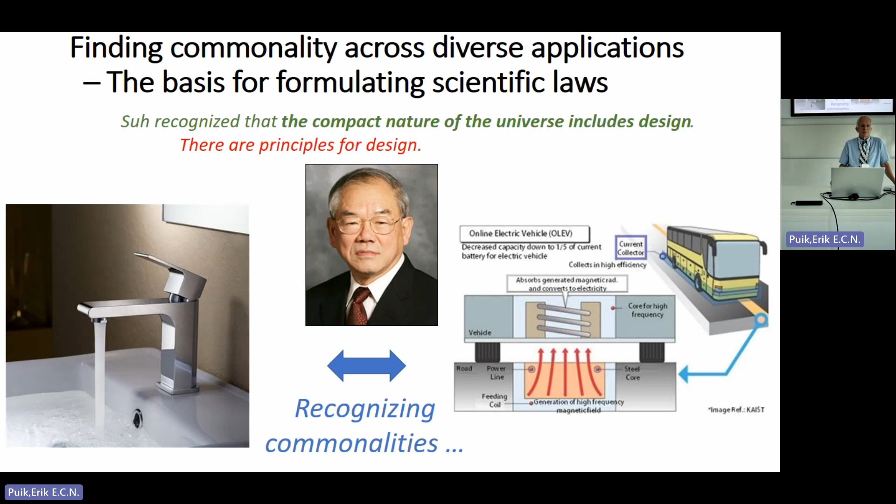So looking for things like the law of gravitation requires looking at commonalities across very diverse applications, just like an apple falling on Earth and the little lights wandering around the sky at night that the Greeks called planets. And so what are the commonalities between a water faucet and an online electric vehicle? And how are those things connected?

Well, two axioms. Now, oftentimes we get engrossed in the application, how to apply axiomatic design, but it's called axiomatic design because we've got two axioms. And so we need to get these out in front, all right? So we have the independence and the information axiom. There's corollaries and theorems. I'll leave that to you. So we have the design theory, and then we have a design method that's based on that.

Now, when I talk to our engineering students presenting their senior projects, after 4 years of studying in the United States, investing over $250,000 and 4 years of your life, and it's design that distinguishes engineers from scientists, creating something new. And I ask, so what design method did you use for your project? And they look at me, oh, the usual or something. And I ask, and what design theory is it based on? And they look at me like I came from Mars, like they'd never heard these two words juxtaposed before.

And alarmingly, when I go to GE aircraft engines and teach a course on axiomatic design, as I've done, I get the same response. Like, what is the difference between the design method and theory that you're using now to design aircraft engines and what you did in high school before you went to college? Not analysis. Yes, that has developed a lot, but the design, the way you come up with and develop a concept, ideas. And they can't think of anything.

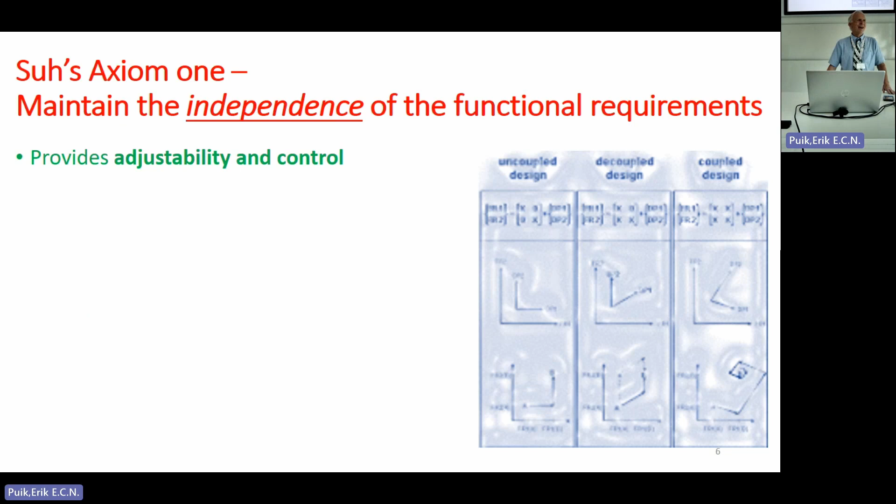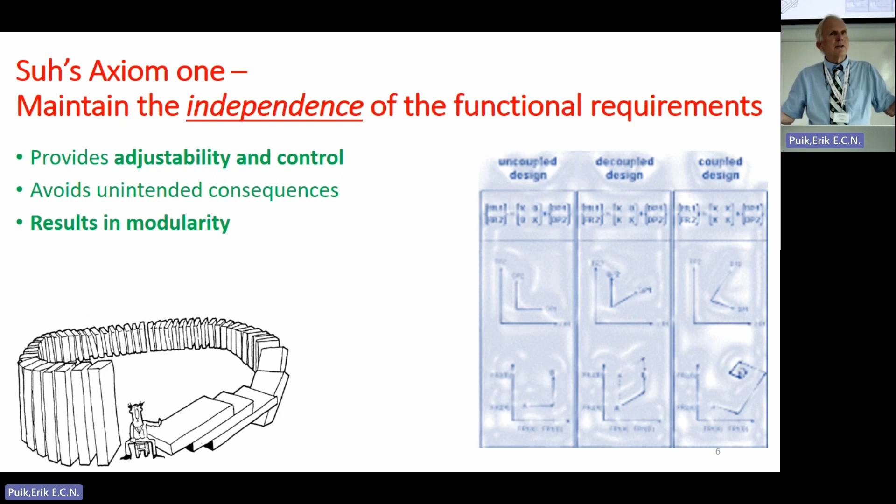All right, good, okay. So adjustability and control. We like to avoid unintended consequences. These are often what lead to cost overruns and delays in design. We finally get to make a prototype, start testing out, geez, this doesn't work. Modularity is great because we can switch things out, like the Toyota production system and Toyota design system.

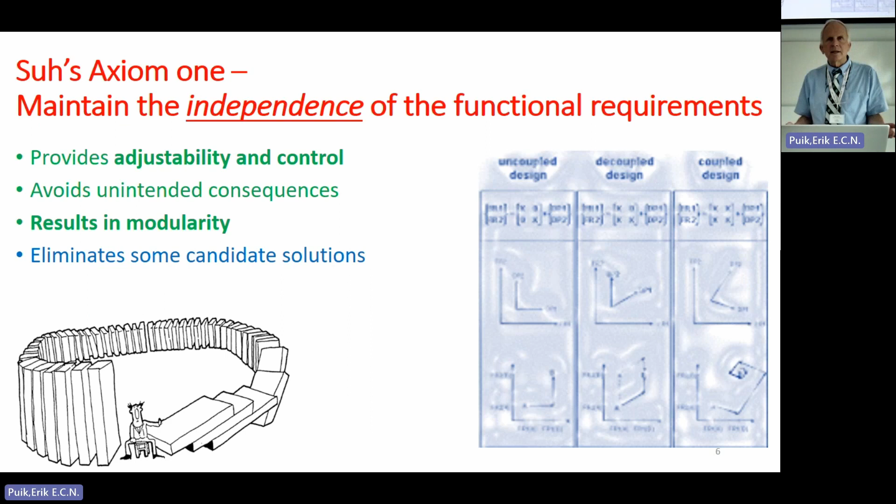And so if we require this independence, we eliminate some candidate solutions. And I'll talk more about how we do that stuff. So that was axiom 1, maintain independence of the functional requirements. And then minimize the information content. Now this gets confusing because some people think, well, information, isn't knowing more good? I like more information. Not if you need that information to make a design solution work.

The more instructions that it requires to get something to work, the greater the chances that somebody forgets one, doesn't understand one, misapplies one. And so that reduces the probability of success. So when you see information content, you can think sort of 1 over the probability of success, as it is quantitatively there. Information content is equal to 1 over the probability of success. And for the people that are familiar with Shannon's information theory or Boltzmann, for entropy, it's similar. So as I said, more instructions.

So information content does not equal knowledge. We have to separate these two things, at least when we're considering this. So axiom 2 essentially encompasses axiom 1. What are we looking for? Probability of success and having our design work. And anyway, because axiom 1 was about independence, lack of ability to control and adjust is going to affect our probability of success. So we could also say axiom 2 will reduce uncertainty and complexity in design, so minimizing malfunction possibilities and influence of wear, temperature, other things that change.

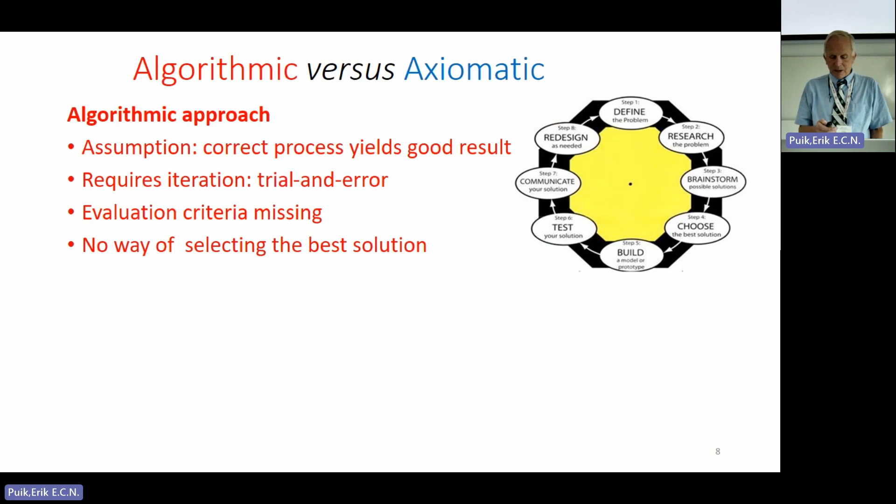But there's no way of selecting the best solution a priori until you try it. And then you don't know if you have the best one. You go, oh, geez, we got a prototype that works. So axiomatic design, we've got 2 axioms, and this essentially guarantees the best solution for a set of functional requirements. So we'll be talking about the importance of getting a good set of functional requirements. It also has an overarching and inclusive structure.

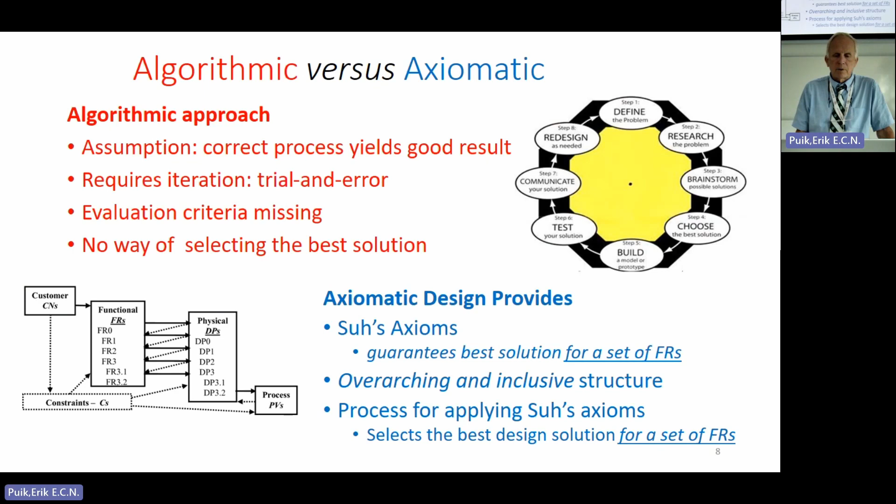So yeah, we could have little bits of algorithmic stuff in there if we wanted, and I'll talk about how I like to integrate something called CK theory. And we need a process for applying Suh's axioms to make this work. We talk a lot about design thinking, and we have to do design thinking. So when you ask people, they go, oh, we have to do design thinking. And you go, so what is design thinking? The answer I get most often is, oh, thinking about design. And you go, okay. Do you have another one without just switching the order of the words? So being an American, I like to go back to the architect, Louis Sullivan.

So think of a function. This is what Nam Suh says in axiomatic design: formulate a function that satisfies a customer need, and then select the form, the physical solution, the design parameter. Remember these abbreviations: FR, functional requirement; CN, customer need; and DP, design parameter. The design parameter is the physical solution.

We have to watch out, because design can be a result or a process. Lots of times we'll talk about the design solution being the physical manifestation of how we're going to do it. There's this neat example that I credit Professor Selenius with. As I understood it, he was first introduced to axiomatic design and decided to spend a year at MIT learning more about it from Nam Suh, and he came up with this example then.

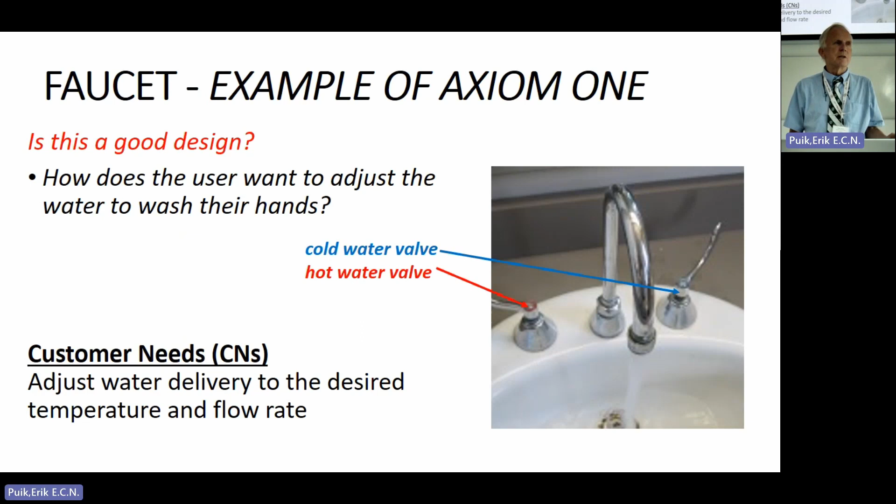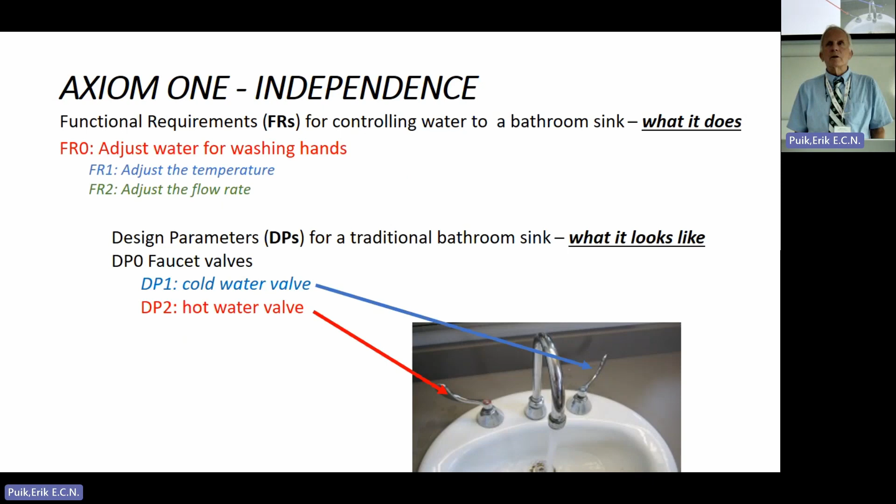What do we have for adjustment in this setup? A cold water valve and a hot water valve, so we've got 2 handles. Is this a good design? The question is, can we adjust flow rate and temperature independently? Functional requirement 1, adjust the temperature. Functional requirement 2, adjust the flow rate. The design parameters: control a hot water valve and a cold water valve.

If we make a little matrix like this, we put the functional requirements down the left side and the design parameters across the top, and then we put an X in the matrix if there's an influence. We can get more sophisticated and put equations in, but for now we're just going to ask: if I write the differential equation relating FR and DP, is there a non-zero term for FR1?

And you go, yeah, that's right. If I change the cold water, it's going to change the temperature, and if I change the hot water, it's going to change the temperature. As a result, I have an X in the A11 and A12 positions in the matrix. And if I want to adjust the flow rate, both of these DPs are going to influence the flow rate.

We all have had experience with this at home. We sort of know how to adjust these, but we go to a new place, make a guess, and stick our hands under to test our prototype. Whoa, I get too much water, it's too hot, I've got to turn one of them. After a few non-productive iterations I'm not getting my hands washed, but that's not very important. I can waste a little water; we haven't completely ruined the planet.

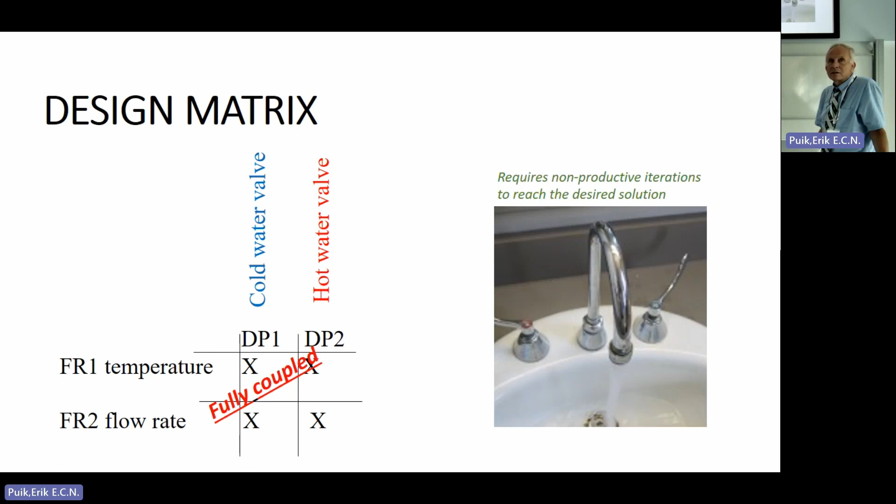But if this is production, if I'm making computer chips and I have to do these iterations to adjust, what was it, 3 months to make a chip? This would not be a good system for doing that. So independence is important. This is fully coupled, so it's lacking independence.

So what's a better solution? We've all seen these nice controls for a faucet. Up and down does flow rate, and side to side gives us temperature. Going up and down doesn't do anything to the temperature; it just does the flow rate.

So we have the interactions. Side to side gives me the temperature. Up and down does not change the temperature. So we have a representation, and this now satisfies axiom 1. It's a diagonal matrix.

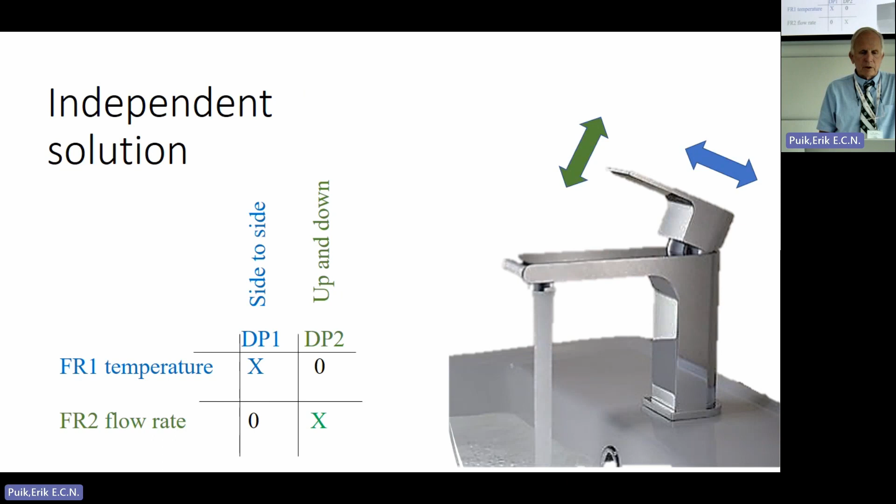We could also satisfy axiom 1 with an upper or lower triangular matrix. So that was an example of axiom 1. The example of axiom 2 that I came up with, I wish I had something as clean and neat as the faucet.

But in this case, we're trying to make a clamp, and we've got it represented here by 2 pieces. It could be adjusting a chair or something like that, and we adjust it, and then we close the clamp, and the clamp is represented here by this oval. And it has in it some sort of spring. I mean, everything's a spring. It could just be a bolt and very stiff, but there's some sort of spring system.

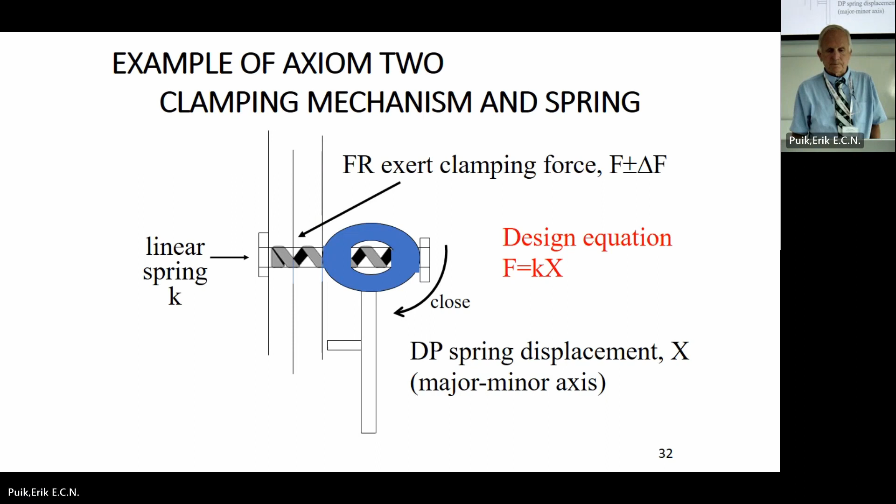And then, as I close this, my design equation gives me the force. So FR, I want to exert a clamping force. And then my design equation, F equals Kx, where K is the spring constant. And then the physical thing is the displacement as I close the lever.

So if I can graph it this way, I can say, all right, here's the range of forces that I might have. And if I have too much of a force, I'm going to break something, or I can't close the clamp, and too little force, it'll slip. So there is a functional tolerance in the function, which is applying the force.

And then I have a physical tolerance, which is what are the dimensions of my cam, and how well have I controlled that? And that, of course, could change in production. That could change with temperature. That could change with wear. So I would like to have a nice big physical tolerance. So if I have a stiff spring, K2, a little bit of motion, I get a nice clamp.

And I admit, when I first looked at this problem, I thought, I want a stiff spring in there because I want to be able to exert a bunch of force. But that turns out not to be the best solution by axiom 2. The best solution with a higher probability of success is to allow me more tolerance in dimensioning the cam and getting the spring constant right. So I would like to have a softer spring with a smaller spring constant.

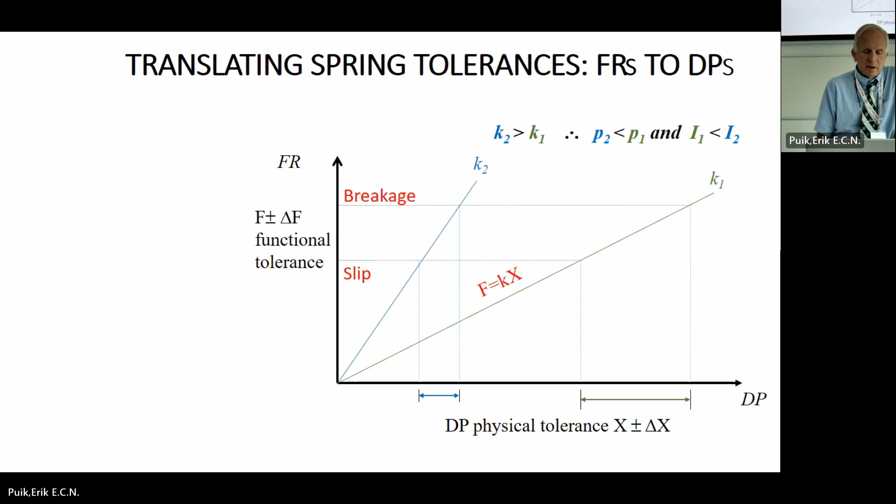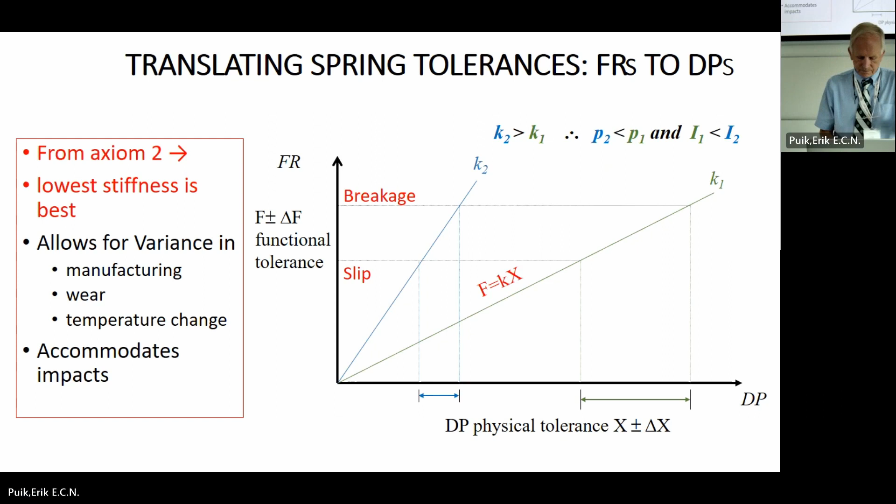That is just a linear system. So axiom 2, lowest stiffness is best. So there's lots of systems that we could design as being linear. And so this allows for variance impacts, as I said. So, okay, there's the beginning of the introduction.

So how do we make this work? So we have, as we said, the root are the axioms. That's why we call it axiomatic design. So how do we apply these axioms? Well, we need some sort of structure. Just like if we're doing Newtonian mechanics, I need a free body diagram. I need something like a free body diagram to apply Suh's axioms. And then I need some sort of process for creating the structure. So I like to think there's 3 parts: the axioms, structures, and the process.

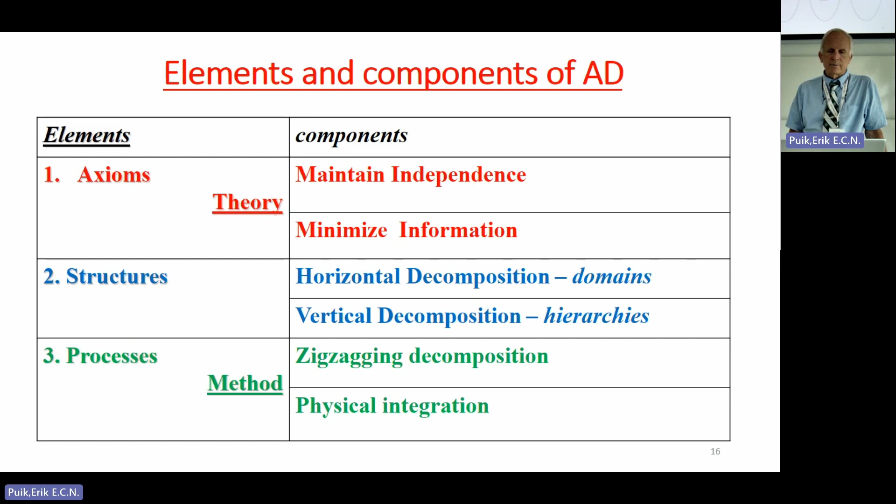So let's take a look at these. So we have 2 kinds, 2 of each. So for the domains, and this is part of the structure now, we have got 4 domains. We've talked about customer needs, and then we generate the functional requirements. So these are what it has to do. These are like engineering terms, what it does. This is customers, stakeholders, everybody. So what sort of things do we want or don't want, and we make this stuff, because that is where the value comes from.

Then this is what it needs to do, something that I eventually can put in an equation. And this is what it looks like. This is what goes on a print. This is what's often called the design. This is the physical solution. And then I haven't talked much about this, and I won't, but it's the process. That's how it's made. So if I'm designing a design process, I may use all 3 or 4 spaces.

Often, though, I can just use the middle 2. So that's what I'm going to concentrate on, FRs and DPs. And that's sufficient, I think, to do this. You can either extend it or figure out how to reformulate design of processes.

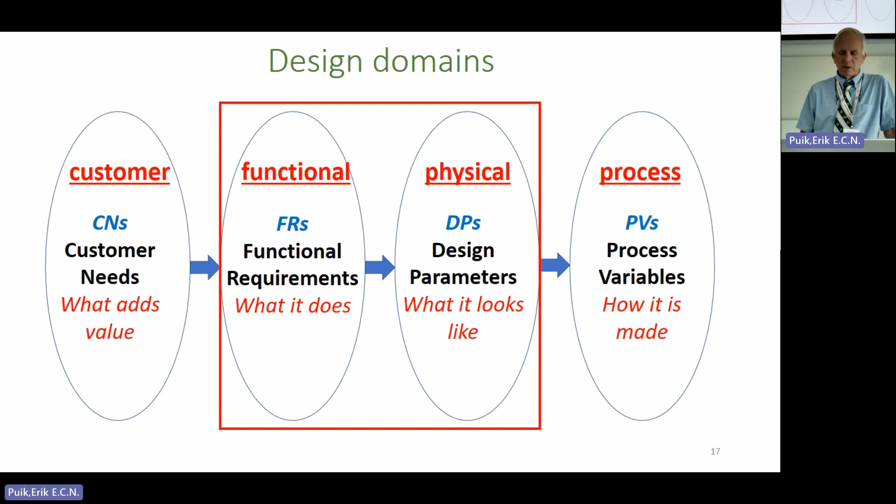So you're working with FRs and DPs, but that was the subject of the paper a few years ago. So decomposition. This is another part of the structure, this vertical structure, and I'll show you this more in a moment. But the decomposition is terribly important. So we talked about functionalism, then we have reductionism. You may not have recognized this, but this is part of our philosophy of science. How can we get down to the most fundamental level of how things work or are built?

But reductionism, how do we break things down to a finer and finer level? That's what we're trying to do in the decomposition. So we're looking at these top-down parallel functional physical decompositions. We need to decompose to a fundamental level where the solutions become obvious to us. As we said, we've got the CNs, customer needs, functional requirements, design parameters. We start off at the 0 level and the PVs. So this is sort of domains of scope. This is the horizontal structure. And then we decompose that.

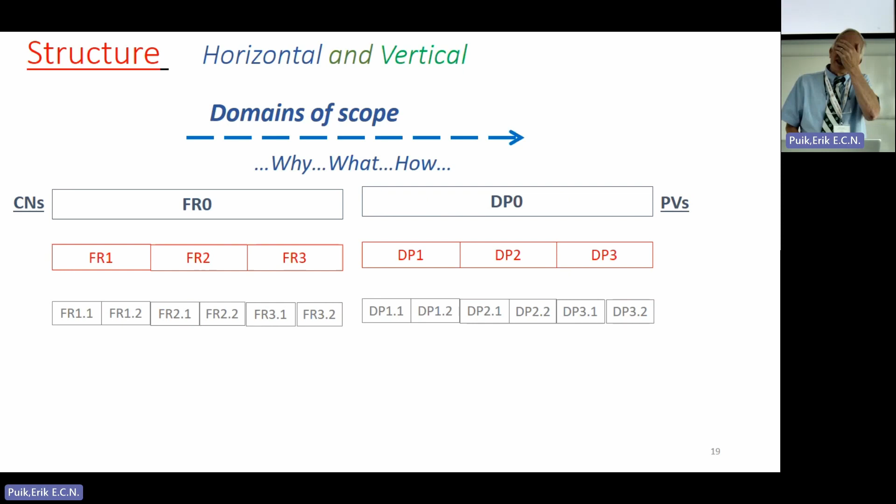Now I've showed 3 here. We could have lots of different numbers. I like to stop at about 7 or 8 because that's the most that you can sort of do mentally. But you can have systems where you get much higher numbers. So each of these can be subsequently decomposed. I've done it just into 2. A frequent mistake that we see with students, I'll talk about later, is I decomposed it into 1. No, you can't divide things into 1. You have to at least divide them into 2. But anyway, there's ways of handling that.

So the point is that we can keep going. And somehow here at the bottom, it was known before I got involved as the leaf level. The leaves are usually on the top. Okay, it's the leaf level at the bottom, nuts and bolts. But this is where solutions become obvious. So we've got the domains. This is the horizontal decomposition, and then we've got hierarchy of detail as we break this down for the reductionism.

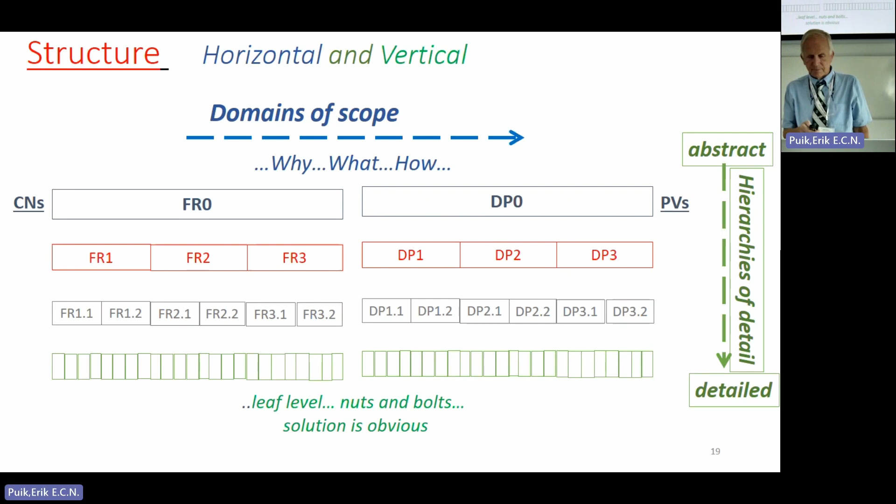And so we can also look at this with set theory. One of the things I know in the United States we don't do very well, I don't know how you do here in the Netherlands with this, we don't teach people how to decompose problems. But this is fundamental to problem solving. You get a very big problem, you've got to decompose it. And so what are the laws that we use for decomposing? Well, one is we want the decomposition to be collectively exhaustive. Did we think of everything?

So we're starting off at our 0 level up here at the top, the parent, and then we keep repeating this kind of structure. In a decomposition, we start off with the parent, and then we have some number of children. So if I sum up the children, they have to equal the parent. Now, we'll be talking about this mostly qualitatively, I think. But it has to become quantitative at some point. If I'm designing for Airbus, I hope that they're doing it quantitatively. Because when you come in for a hard landing, I want to make sure that landing gear holds up.

The other thing is mutually exclusive. So I want no overlap between the children. The decomposition needs to be orthogonal. I am creating and decomposing a multidimensional orthogonal space. Usually we run out of dimensions when we get to 3 getting orthogonal. How do I get a 4th dimension at right angles to all the other ones? Mathematically, it's easier to formulate, but that's what we're trying to do. So the sum of the children should equal the parent, and we can do this in vector notation as well, and that's what we have, these multidimensional vectors.

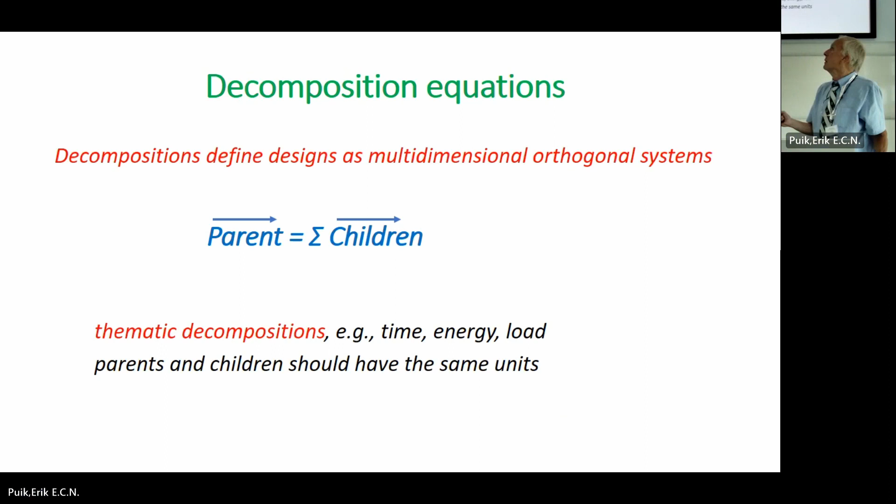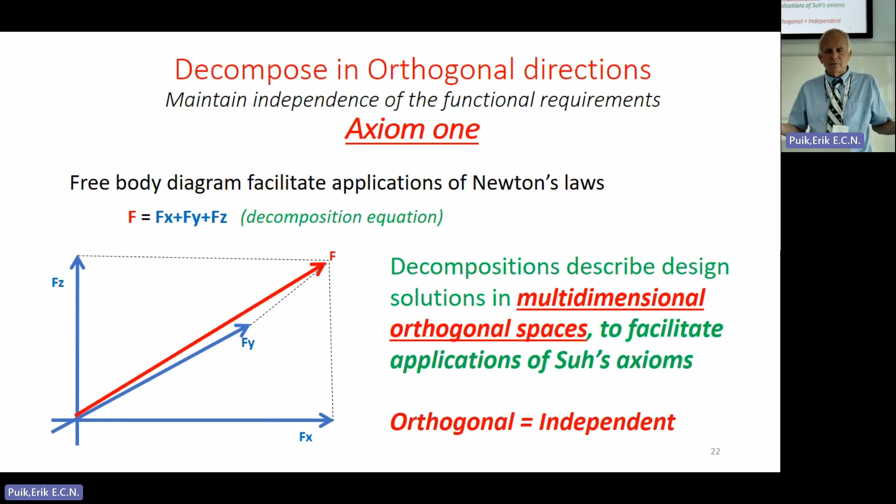So anyway, here's this idea, sort of a multi-dimensional orthogonal space, and we're thinking about Newton's laws. I think we've probably all seen this, I hope, in pre-college physics, adding up the vectors to sum. So multi-dimensional orthogonal spaces. Orthogonal is independent, for the independence axiom. So anyway, we do this.

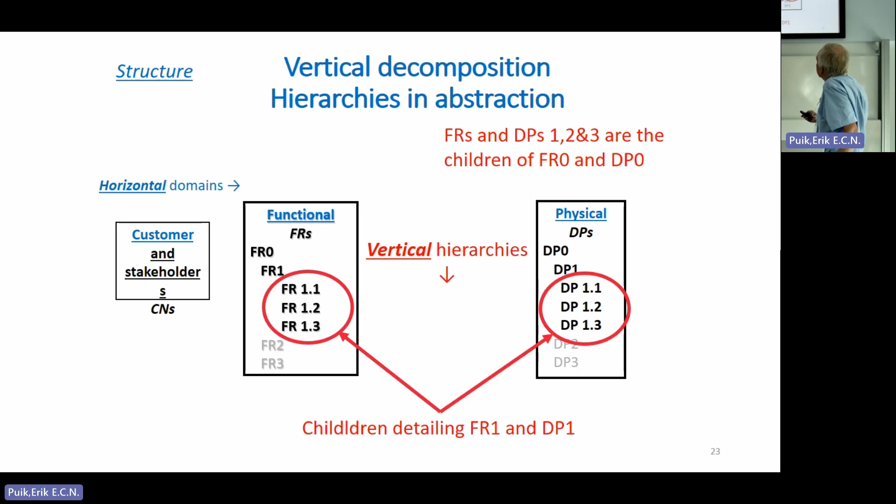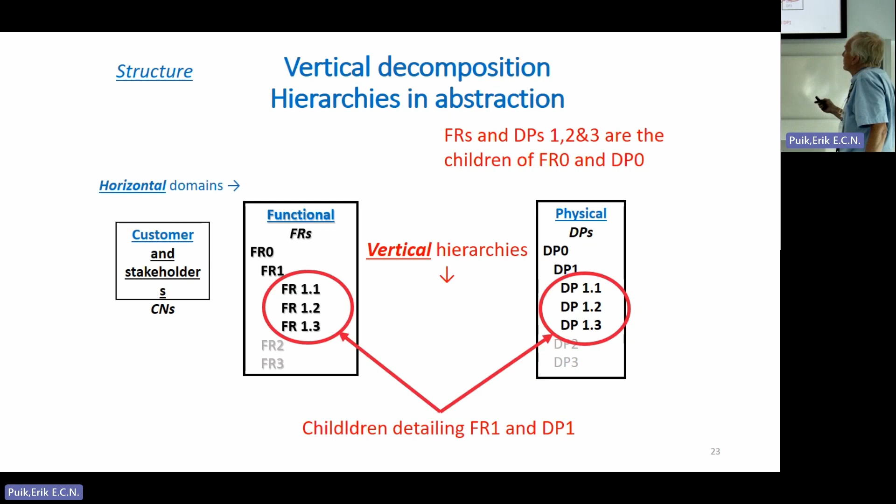We're developing the vertical hierarchies. So we're looking at detailing what we have in the parents as we create the children. So there's children detailing in that particular branch at that level. So branches are like FR1, FR2. We get the first, second, third branch, and then the 1.1 branch could develop on its own. And then we've got the levels as we go down in the branches.

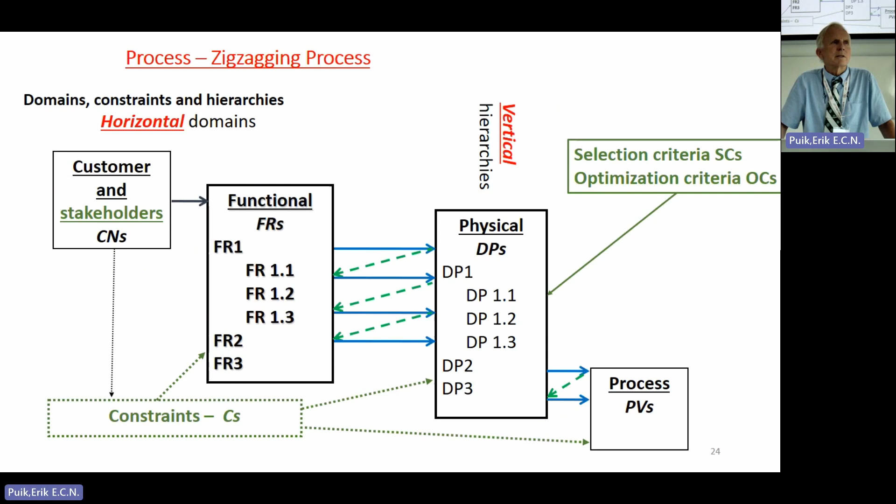Now, I haven't talked about constraints. These are things that design shouldn't do. An important one, because engineers have done a remarkably impressive job at ruining the climate on the planet. So a constraint should be that design should be sustainable. We should not be teaching engineers anything else. Do sustainable designs. Those are the only acceptable ones. I don't think we're doing a particularly good job of that, but in any event,

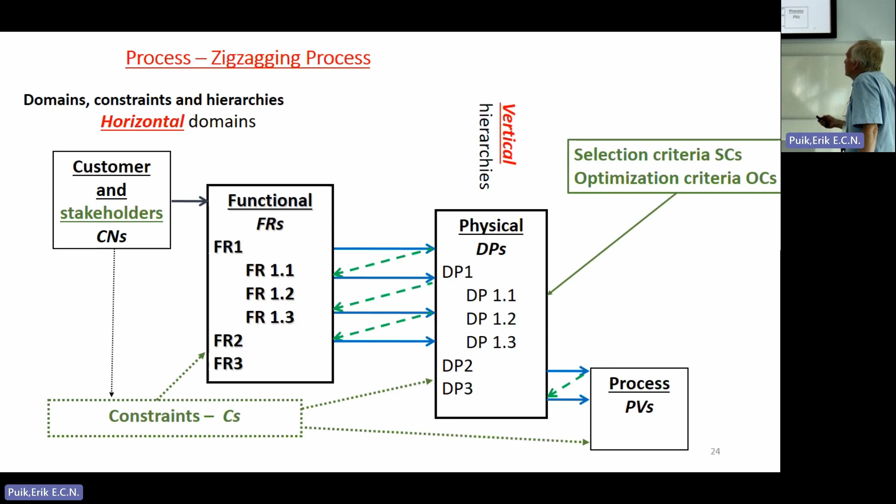so anyway, we get the horizontal, vertical hierarchies. We get constraints, which we could put in any domain, and these might be legal, they might be physical. Oh, and then there's one other thing here. We got selection criteria and optimization criteria. I'll get back to those in a moment, but those are things that don't rise to the level of FR. So our process. So we're down to the third thing. We've got the axioms, we've got the structure, and now here's the process.

It's zigzagging. Function first, then form. So zig, zag, down to the next level. Decompose the functions. Function first, then form, then down to the next level. So zig, zag, zig, zag. So that's the zigzagging process. At each level, get the FRs first, then go to the design parameters. This is the other word for you. FRs first, then design parameters. Okay, and we keep going down until the solution is obvious.

So some decomposition rules. FRs should satisfy customer needs. FRs satisfy CNs. FRs start with verbs. This is something we've got to do. They're stated in the imperative. In the United States, we stopped teaching grammar some time long ago. I have to explain to engineering students what imperative means, but not surprising. So DPs, this is the form that follows the function. So these are forms. They start with nouns.

And we would like the minimum number of FRs, minimum number of DPs, and they have to be collectively exhaustive and mutually exclusive. So lots of people think of design, oh, I'm going to think of things that the other people didn't think of. That's right to a point, but make sure that you're collectively exhaustive and mutually exclusive, because otherwise your decomposition isn't going to work. So CEME min: collectively exhaustive, mutually exclusive, minimum number. Did I think of everything, and did I avoid overlap and redundancy?

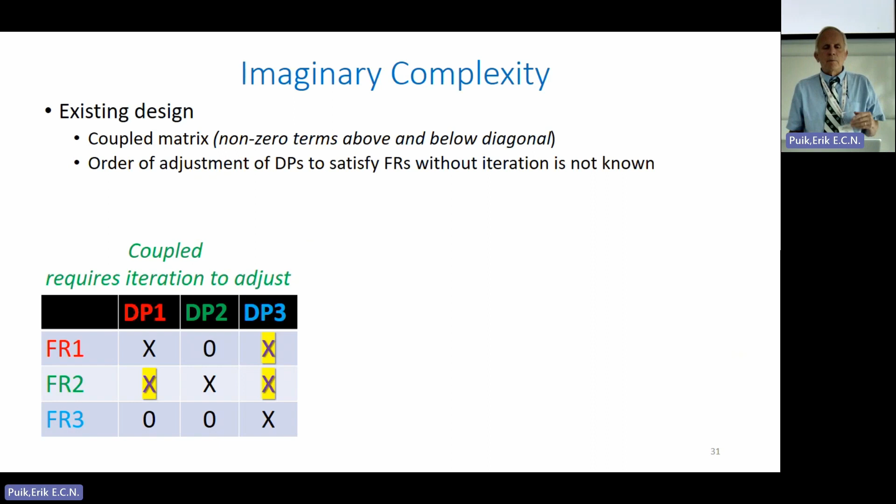So sometimes we come upon a design that's already done and it's difficult to adjust. I adjust this, and now I'm going to change this, just like the hot and cold water. And we go, all right, maybe this is just imaginary complexity, and I can take this and rearrange it so that it becomes upper or lower triangular. And so if you're familiar with linear algebra, you can see that I can rearrange these so that now my order of adjustment is 3, 1, 2.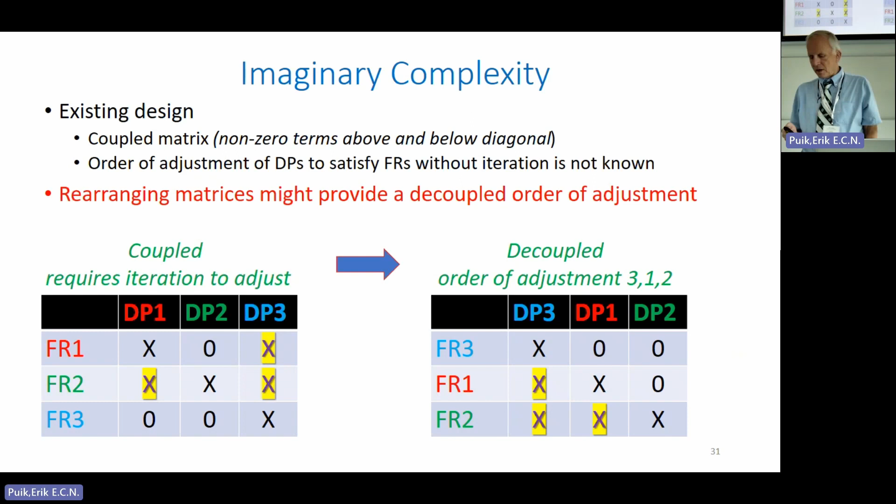Changing DP3 changes FR3, 1, and 2, all of them, but I can fix FR1 with DP1, but then I might do something unwanted to FR2 and take that out of tolerance. And last, I can use DP2 to adjust FR2 and get that within its functional tolerance by changing the physical tolerances. So that's the way I can handle imaginary complexity. And there's lots of systems like that you can take a look at.

So 3 basic steps for axiomatic design. We want to formulate the functional requirements. We get the CNs somehow. We formulate good functional requirements. Then we devise or select design parameters, or we get a bunch of design parameters. And then we apply Suh's axioms, so we select the best design parameters. And then we have to physically integrate. So once we get through the decomposition, we've got all the pieces on the table. And now we go, all right, how do we put them all together without violating the axioms?

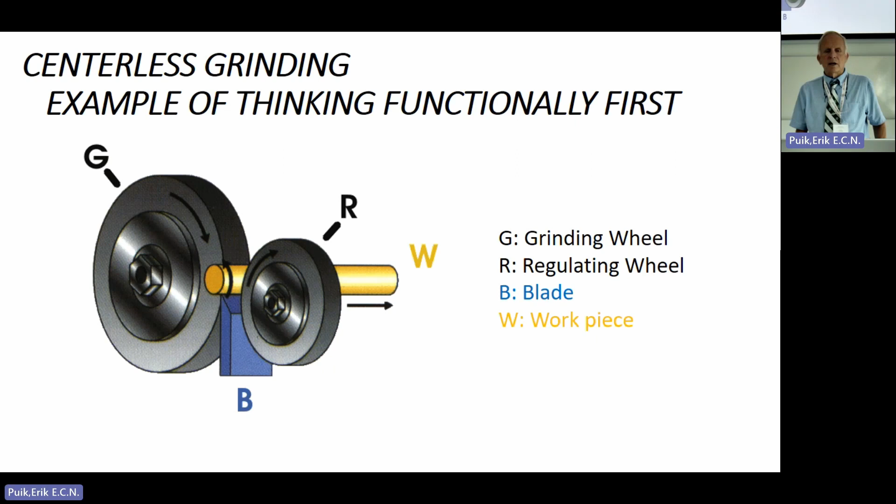Here's a quick example. Local industry is making these pieces for arthroscopy, for surgery, that have to stick into your knee or someplace. And they required very tight tolerances to work together. The part that gets inserted, the ends look like this. They're for nibbling off bits of your meniscus. And it was fed into this centerless grinder by hand. I was teaching axiomatic design at this local company. The person who was doing it left, and he was doing it very well. They couldn't get anybody else that could do it well.

These big wheels spinning around are kind of scary. And the people were dropping it in, and they already had the sharp ends on, and they were worried about those. And every time one got in sideways, the wheels would jam, the wheels would get out of adjustment. And so they're way behind on orders. And they were figuring they would get a robot and just mimic what the people did. Yeah, sounds like a good design solution.

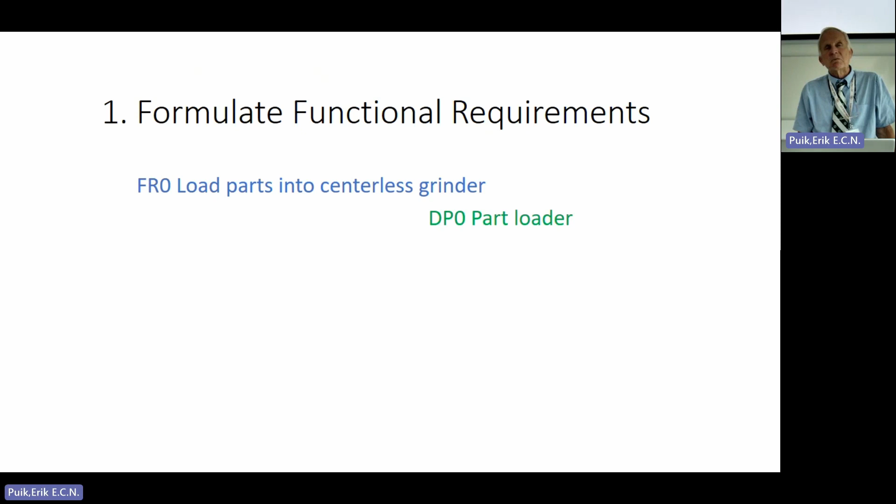But we said, all right, what are the FRs here? Formulate the functional requirements. All right, load the parts. Got it. FR0. DP0, part loader. Okay, why did I have to study axiomatic design for that? All right, so let's decompose it. What do we need to load the parts? Align the parts prior to insertion, maintain the alignment, and protect the operator from the sharp ends.

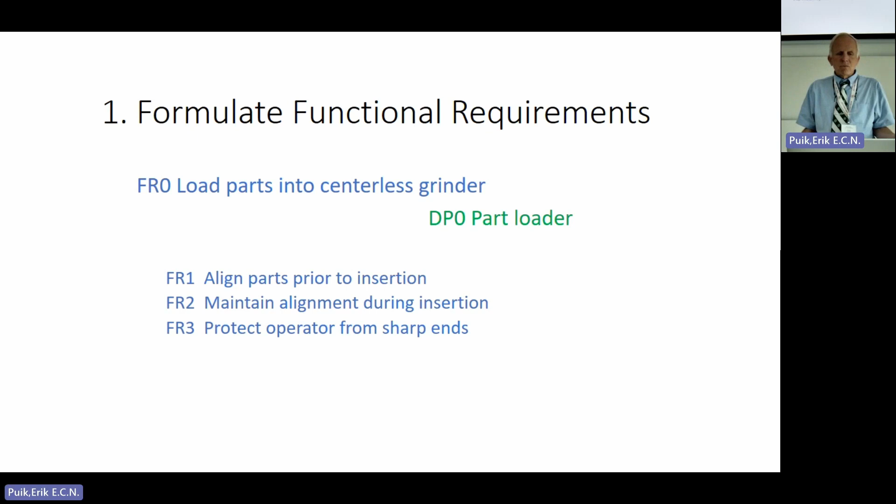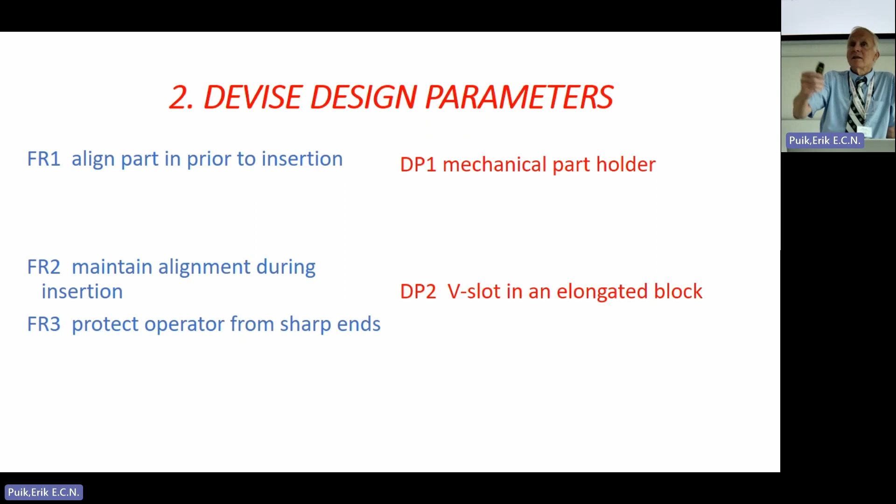And so we asked the group, does that do it? Yeah, that does it. If we did all that, we'd be happy. I go, all right, so let's see. Some sort of part holder to get that alignment. A V slot, I can slide things along in a V and introduce it.

And then a push block, so that once I put it in the V slot, as I'm introducing the machine, I don't have to do this. So somebody in the room, I could see a light went on. He walked out of the room at that point, and about an hour later, he said, "It's in production, it works." And they were allowing like a month to invest in this. Which robot should we get? How are we going to train it?

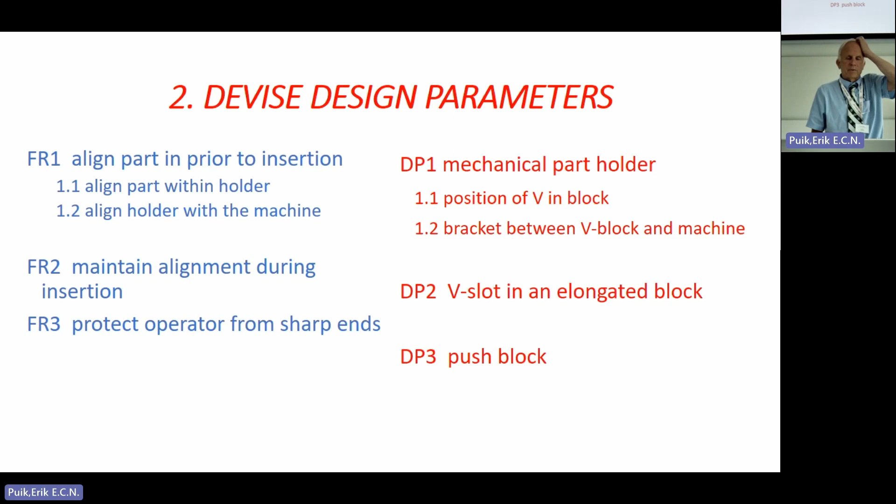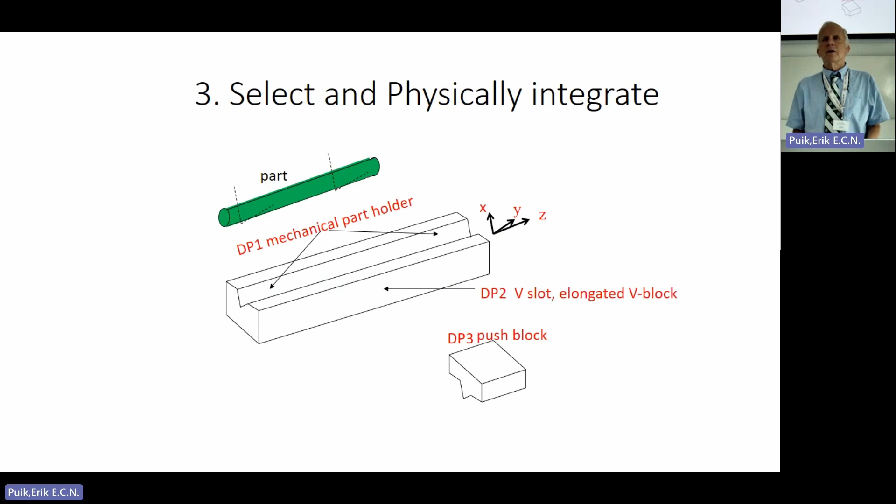So anyway, there's a couple of further decompositions to get to the solution, a V block and a push. But you weren't getting to that unless you decomposed it properly and thought about what are the functions that we actually have to do. So clear statement of functional requirements. So there's another one, especially for those of us that remember the space shuttles, and as I said, I get to work on this with Nam. So this didn't work particularly well.

It was designed supposedly for one loss of crew in 500 missions. How do you design for one loss of crew in 500 missions? This is quite a complicated thing. What sort of failure is going to occur? What's our probability of success? But it wasn't decomposed. And so we had 2 losses of crew in 135 missions, clearly unacceptable by the original design criteria. So what are the functional requirements?

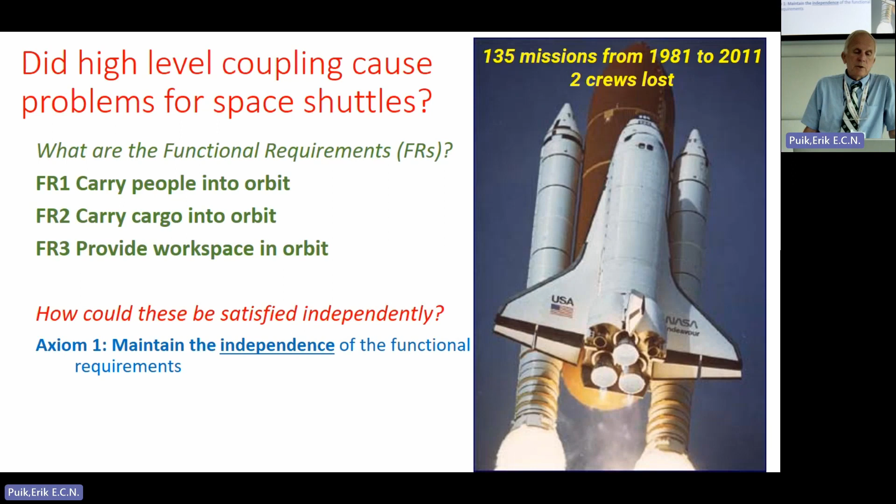Well, carry people into orbit, carry cargo into orbit, and provide a workspace in orbit. That's what we were trying to do. Now, we put it all in one, partly because it had to make it through Congress, and we needed something, spaceship lands on Earth. Congress screws up a lot of stuff. But anyway, so how could we do this independently? So let's just take a look at Axiom 1 here.

Separate launch vehicles dock in orbit. We did this with Gemini. So this was the problem we solved in the early 60s. Right? We could dock up in orbit and hook up. So we didn't need to send everything at once, and we already knew that. And so this orbital space plane, the idea was, let's have something like a Subaru station wagon with wings, and we'll use that. So what we needed was, carry people into orbit, a shuttle for personnel,

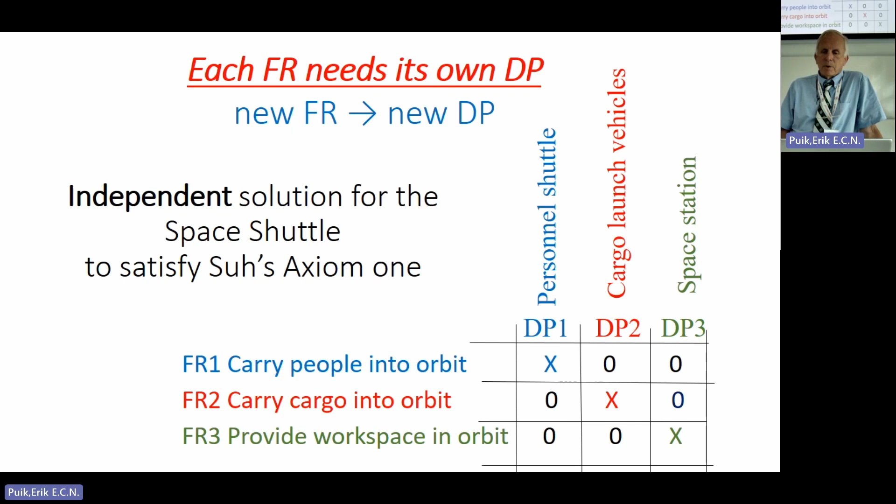carry cargo into orbit, cargo launch vehicles. This can be much cruder because the cargo can oftentimes stand much greater accelerations, of course, than the people can. We're wimps in terms of how many G's we can handle. And then provide workspace. So we had space stations, still do.

So metrics, I want to get into this because as you develop axiomatic design this is important. If you can't measure it, you can't improve it. Anybody want to contest that? You might improve it, but you won't know if you improved it, I guess. So metrics. Did the FRs satisfy the customers and the stakeholders? What's the influence of the DPs on the FRs? I'd like to do that quantitatively. I'd like to know if this landing gear is going to hold up.

Did we achieve collectively exhaustive, mutually exclusive decompositions? And then when I have a design team working on something, how do we tell if we're making progress? Geez, we had our meetings, we're supposed to come up with a CAD drawing, but talk to practicing engineers. There's guys that come up with CAD drawings and they're not going to work. They know they're not going to work, but I want to go home. My family's waiting for me. I got to fix dinner. So here's my CAD drawing. How can you tell if it works? What are design reviews like? What's this for? What does this do?

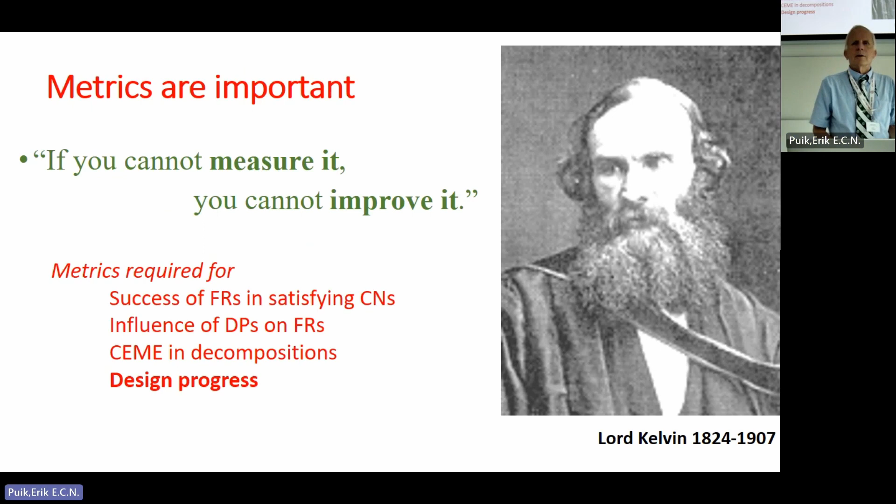Anyway, all right, so equations. We've got the decomposition equations and the design equations. And I do the decomposition equation in vector form, and then probabilities of success. So we want to get quantitative.

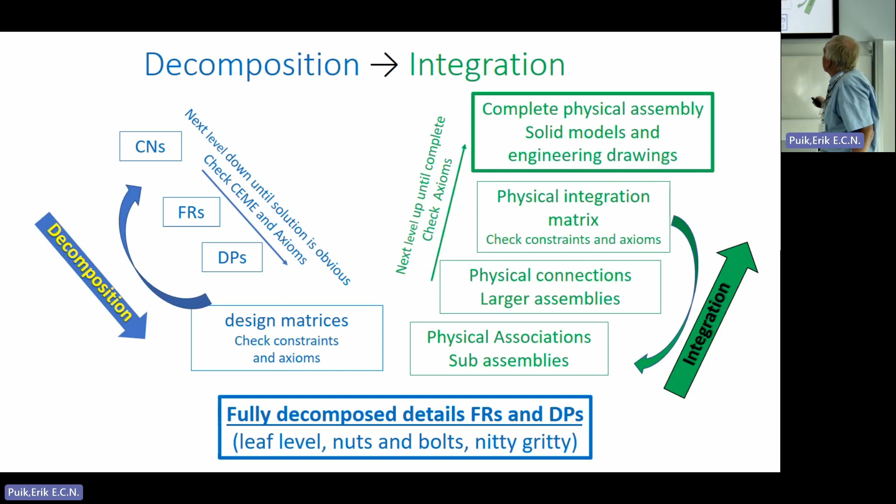Physical integration we haven't talked about, but it's essentially this V diagram where we decompose on one side, and we get down to all the little nuts and bolts, and then we've got to physically integrate these. And so we need to check to make sure we haven't violated the axioms when we physically integrate it. And you can find examples of that.

As we represent the design solutions, what do we need to do? So mostly people think, oh, a CAD drawing, that's my representation. But that gives us the problem of what's this for? So the first thing we do in the decomposition is we're writing, essentially. We're trying to verbalize it. And I love this quote: writing is nature's way of letting you know how sloppy your thinking is.

And I think we've all experienced this. We think, oh, I got a good idea. And then you try to write it down, you go, I don't know. And then the next level is mathematics is nature's way of letting you know how sloppy your writing is. And then you go, yeah, I can write an equation for this. Not as easy as I thought. All right.

So actionability is important. My design representations need to be actionable. I'm an engineer. I don't have to go make this thing. I give it to somebody else.

That's why I studied engineering, so I can wear a tie. Very few of us are wearing ties in the United States anymore. But I noticed that my colleagues had ties on, so I went and got mine out of my room. But I'm an engineer. I don't need to get my hands dirty. I don't need to do real work. Somebody else is going to take care of this for me.

So our design solutions have to be actionable, and maybe to another team of engineers. So intent has to be there. FRs, that's the design intent. That's what this part is supposed to do. And if it's not there, I can't change it. We've got the plans for Saturn V moon rockets. Hey, they got to the moon before. They only screwed up once, really, sort of. And we understand what happened. And that crew made it back alive, too. There was enough redundancy, probability of success. But we didn't do that again.

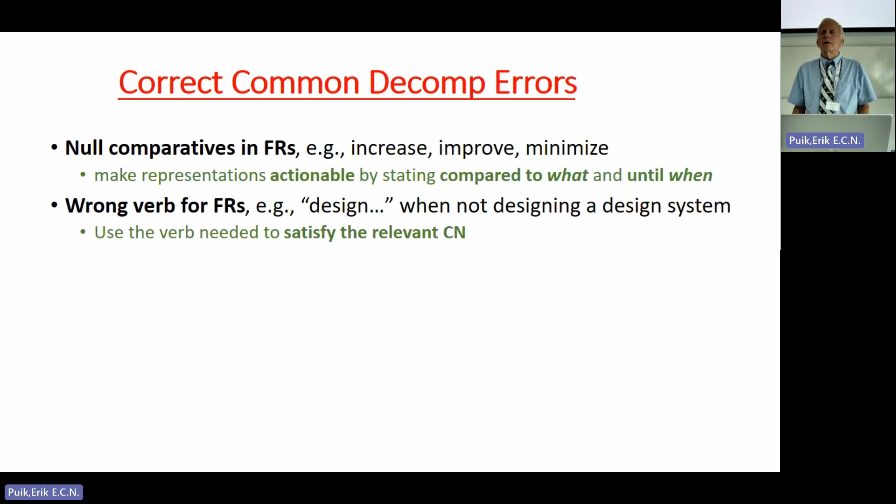Wrong verbs. Lots of people start, oh, I want to design a bicycle. You already did. Bicycle is a physical representation. What problem is the bicycle trying to solve? I want a self-powered transportation device. Okay, now we're making progress. And so often students say, well, I want to design a process to do this. You're not designing a design process. So that's a good thing.

If I want to design bicycles, I'm going to make a company that produces bicycles. I want to design new bicycles. That's an important design problem. But it's not the one usually that the student is thinking of when they say design a bicycle.

DP is not completely fulfilling FRs. Children are not summing to the parents. So, oh, it's a key element. I got it. I can figure out how to do it. And then just put the key element down. Your car does not park itself. If you don't plan on time for parking your car, you're going to be late to the show.

You got to figure out how you're going to do that. It's not enough just to get there. Okay, FRs containing physical solutions. You want the FRs formulated in a solution-neutral environment. I see students doing, all right, FR: provide a bolt, DP: a bolt. No, why do you need a bolt?

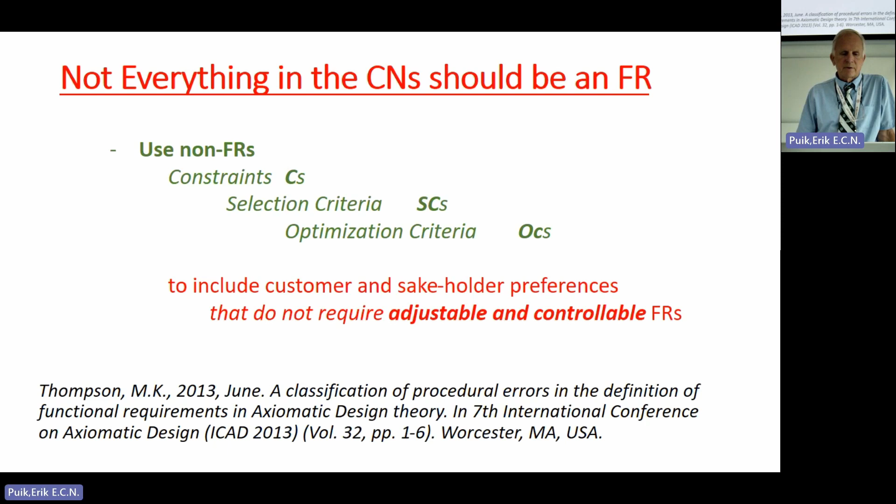And single-child decompositions, right? You can't divide something into one. We've got selection criteria, optimization criteria. Not everything needs to be an FR, like make it pretty or something. Kate Thompson, who I'm sorry isn't here, is one of the best minds that has worked on this stuff. That's a good paper to look at. She presented this 10 years ago at a conference we have from WPI.

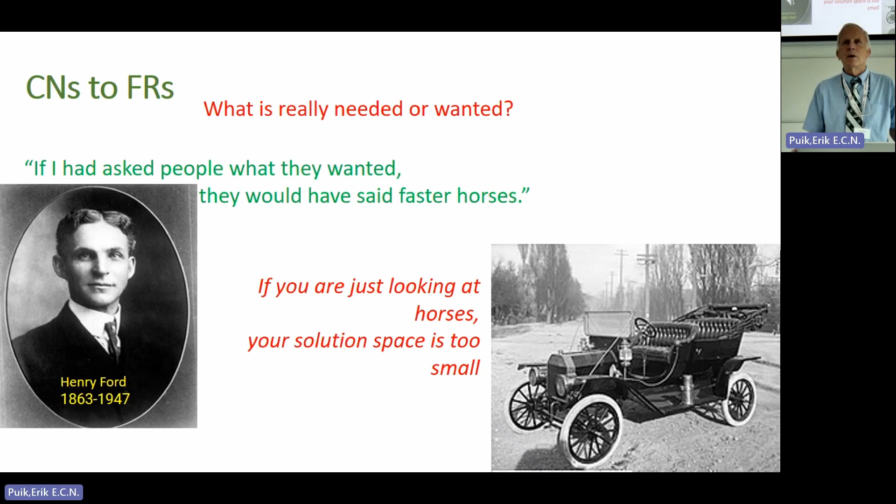So make sure you understand what's wanted. Henry Ford supposedly said, if I'd asked people what they wanted, they would have said faster horses. So if he'd listened to the voice of the customer, he would be a horse breeder from Detroit that we wouldn't know. What are the fundamental needs? So asking why. Why do you need a bolt? And you might do that 5 times. This comes to us from the Toyota production system. Get to the root of the problems.

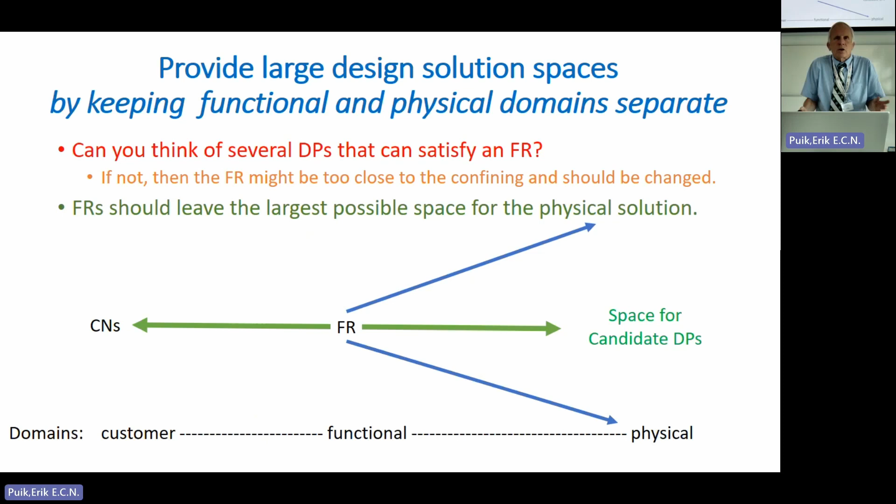Make sure it's solution neutral. Can you back the FR up towards the customer needs so that you've got a bigger design solution space? I've got more room from which I can choose the design parameters. So the more concrete and limited the FR is, the smaller your design space.

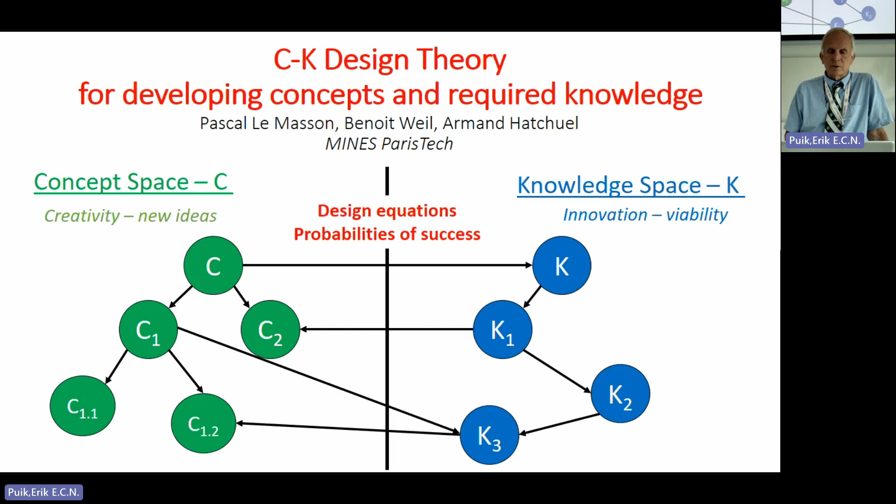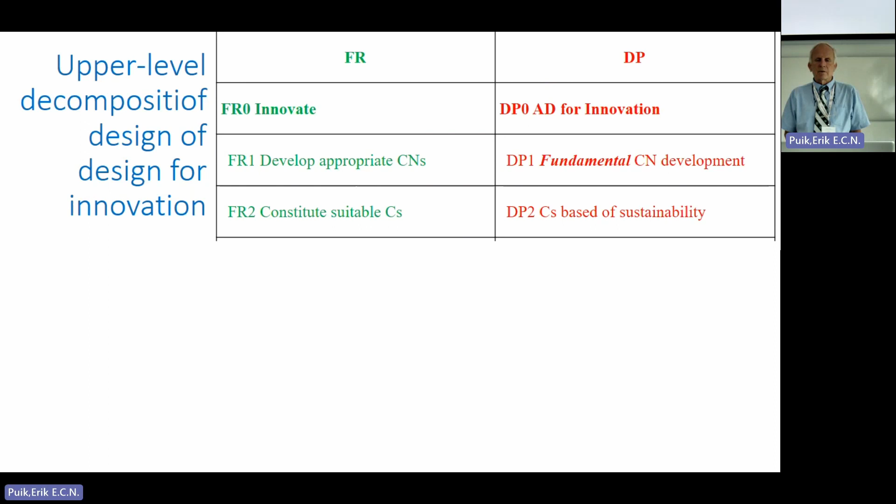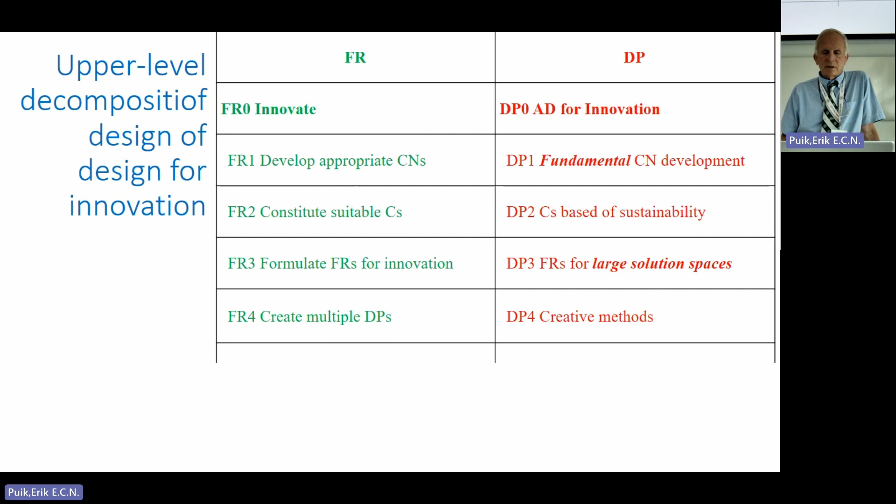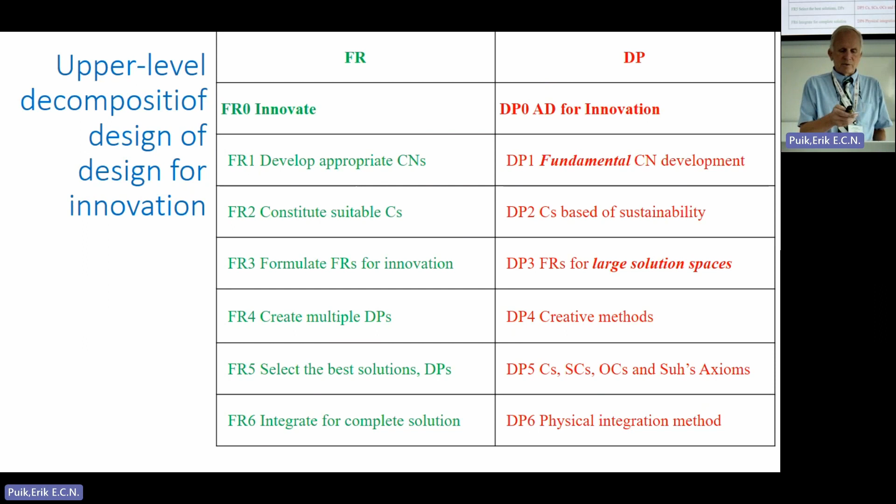So suppose we're trying to be creative. FR0 would be innovate, some sort of axiomatic design for innovation. Develop appropriate CNs, fundamental development, and you'd have to decompose all of these things, constitute suitable Cs. Formulate FRs for innovation, create multiple DPs, so some creative methods. So here's some steps. Designing a design system. In this case, the FR was design of design for innovation. It's sort of like taking an extra derivative mathematically.

So these stages: conceptualize, branching of knowledge, physical integration. To really do axiomatic design, those are the 3 stages that you need and the key results that you should be looking for in an axiomatic design exercise.

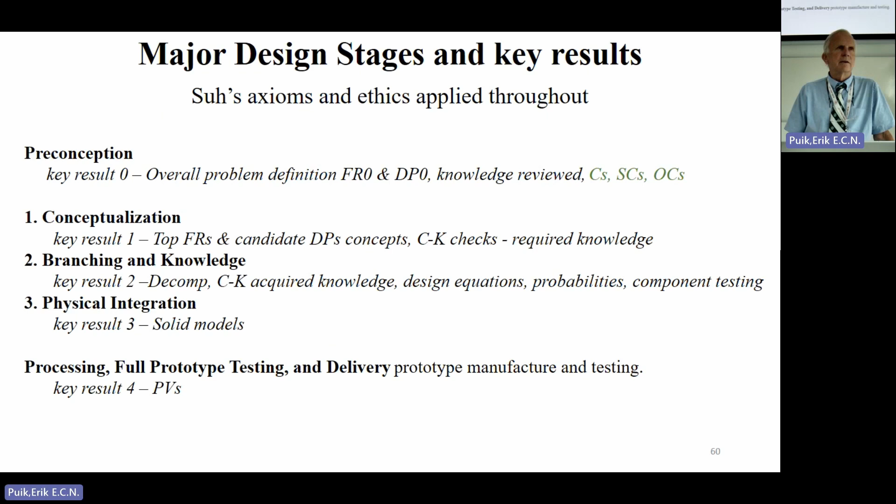I'm almost done. Hang on, I know I'm the only thing between you guys and lunch. I don't want to get killed.

So these 3 things and what you get out of it, and this is like a fractal structure, so it can repeat with similar things. Here's something I've started to realize: you can't wait until you've completed the decomposition. On the space shuttle we had gone through literally thousands of FR-DP pairs, getting down to more detailed things just for crew survivability. If I'm designing an aircraft, I know at the beginning I've got wings, landing gear, avionics, passengers, structures.

So you're going to do upper level decomposition, then some physical integration. The wings are going to go on the side of the fuselage, and I keep doing this as I become more and more detailed. So I don't just keep going down this way and then go all the way up. I go down, and each of these is projected getting down to lower and lower levels, and each is similarly projected doing physical integration.

So I was trying to come up with a new term for this. I thought tacking would be good, because the Dutch like sailing, right? You've got all these fans to get wind. It looks great. They seem to work. When those fans are going around fast, we're getting lots of wind. That's good for the sailing.

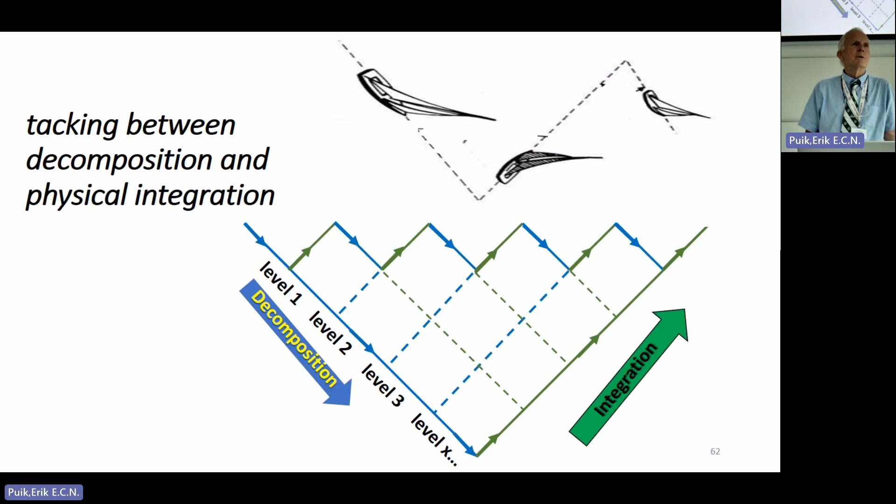Anyway, here we now have 4 books to look at, and we've got one of the editors right here for the 4th book.